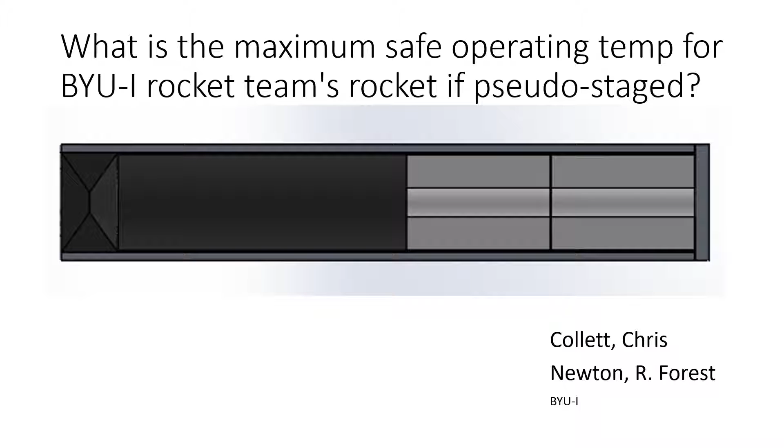Without pseudo-staging, the maximum altitude the rocket can reach is limited to around 10,000 feet without increasing the diameter of the rocket. Pseudo-staging, if successfully implemented, would enable the rocket to reach 30,000 feet without increasing its diameter. Thus, it is essential to ensure that pseudo-staging is possible and safe to implement.

To understand the reasonable limits of the aluminum in the motor casing, this graph from ResearchGate was extrapolated using a cubic spline to determine the maximum safe operating temperature. Temperature affects the yield strength of metals, decreasing it with increasing temperatures. The maximum stress that will be experienced by the aluminum casing is 61.56 megapascals. The temperature at which the yield strength of the aluminum is 61.56 megapascals is 682 Kelvin, making this the maximum safe operating temperature.

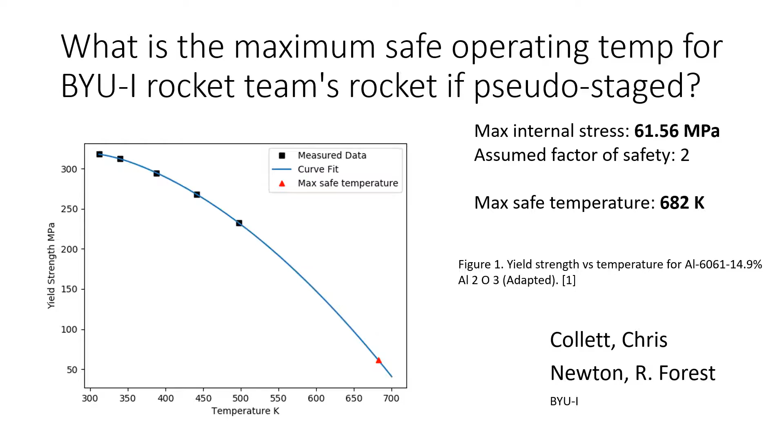The rocket was simplified to a pipe with hot air flowing within and atmospheric air flowing outside. There are hot flowing gases from the exhaust of the burning fuel grains within the motor that are making contact with the phenolic liner, as seen in black, and cool atmospheric air flowing over the outside of the motor, making contact with the aluminum, as seen in a dark gray on the exterior of the cylinder.

High temperature and high pressure gaseous rocket exhaust is difficult to find properties for, so air at 1 atmosphere and 3000 Kelvin was used to define the properties of the hot flowing gases. Only the aluminum casing that is in the section of the motor that is exposed to the hot gases is being considered in this project. It should be noted that the phenolic liner is not being considered to be an ablative material in this case, meaning that it will not melt.

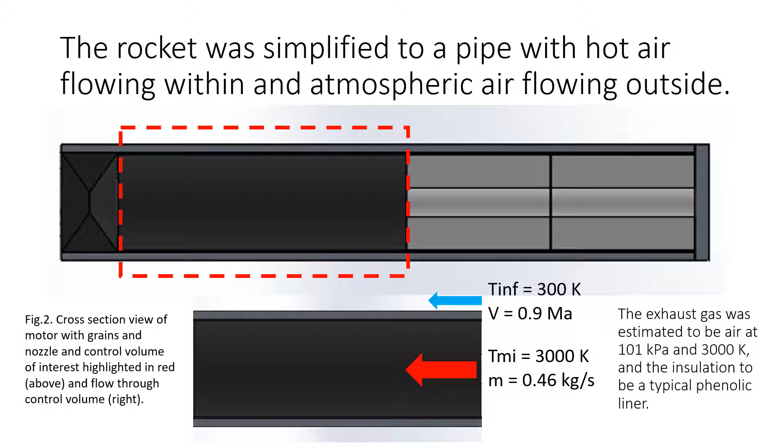From Nusselt correlations, resistance methods, and internal pipe flow, the maximum temperature and time to maximum temperature were obtained. Nusselt correlations were used to find the convection coefficients inside and outside the motor. Internal pipe flow was used to find the average liner temperature. It was assumed that the liner temperature was constant along the length of the motor.

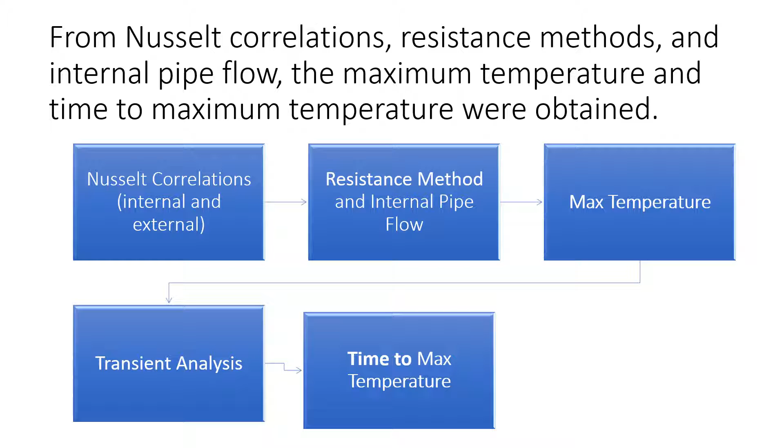A resistance network was used which included convection inside and outside the motor and conduction within the aluminum and liner. It was assumed that the heat loss was one-dimensional, with adiabats perpendicular to the flow direction. Transient analysis using the first term solution was used to estimate the time to reach the maximum temperature.

Using the method described, the maximum aluminum casing temperature was 365.4 Kelvin, about 200 degrees Fahrenheit, reached after 46.41 microseconds, or 4.6 times 10 to the negative 5 seconds. The first section displays the heat transfer coefficients, resistances, heat transfer rate, mean out temperature of the hot flow as TMO, and the temperature of the liner exposed to the hot flow as TL.

This temperature, as a note, is likely to ablate the phenolic liner. However, this will not be considered in this project. The film temperature, as seen at 332.3 Kelvin, was iterated on to find the exterior heat transfer coefficient.

The second section displays the resistances for transient analysis, Bi number, zeta 1, C1, and Fourier numbers. The Bi number was greater than 0.1, indicating that a first-term solution would be necessary. The Fourier number was greater than 0.2, indicating that a first-term solution would be a good approximation.

It is important to note that the transient solution used assumed that the walls of the motor casing were plane walls. This may have caused some error in the time to maximum temperature. To achieve a more accurate time estimate, a new partial differential equation would need to be solved for a hollow cylinder.

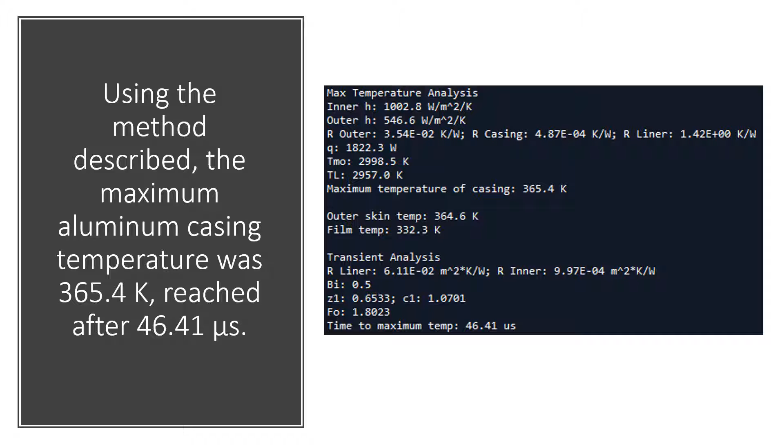The maximum temperature and stress experienced by the aluminum is within the predicted yield strength. Estimating the maximum internal stress experienced by the aluminum casing to be 61.56 megapascals and a maximum operating temperature of 365.4 Kelvin, the yield strength is about 5 times larger than the expected stress. The temperature may seem low, but the phenolic liner is an excellent insulator, making this a reasonable maximum temperature.

Additionally, if the motor got near the maximum safe temperature of 682 Kelvin, residual stress and tempering would occur with repeated use, making the motor unstable. Remaining well within the limit increases the lifespan of the motor casing.

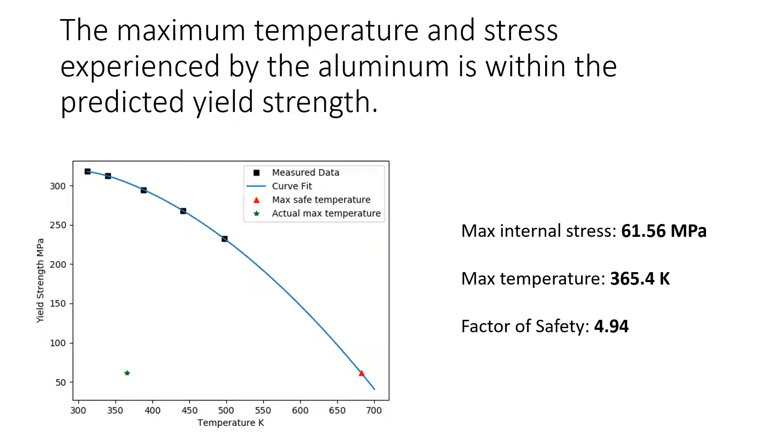From the data collected, it was determined that the aluminum motor casing will not fail due to temperature increases from hot flowing gases. The next step to ensure the viability of pseudo-staging will be to determine how long the phenolic liner can be exposed to high temperature gases before ablating.

Another important step will be to determine the thickness of the solid fuel wafers that must be included to separate the stages. These wafers need to be sized such that they will not break up under pressure and clog the nozzle. They also need to be large enough to prevent upper stages from burning prematurely.

One possible safety measure that can be implemented in case of overheating would be to include a set of screws of dissimilar metal attached to the nozzle at the end of the motor casing, so that before the aluminum casing yields catastrophically, the set screws will be destroyed and the nozzle will explode out the bottom of the casing, preventing the aluminum casing from exploding. For the scope of this project, the motor casing will not fail due to heat transfer.